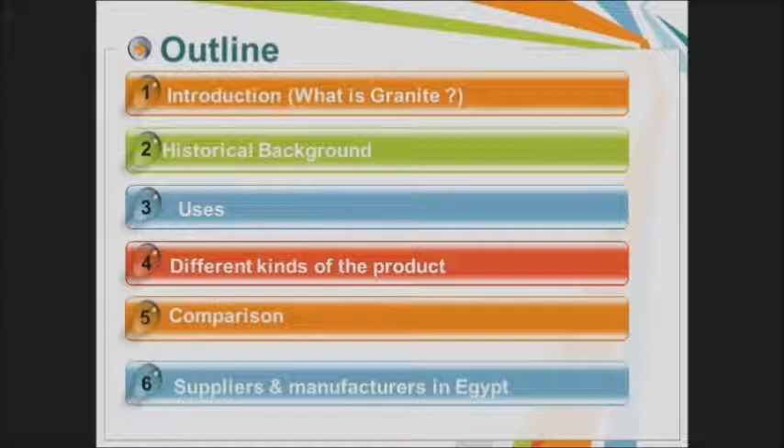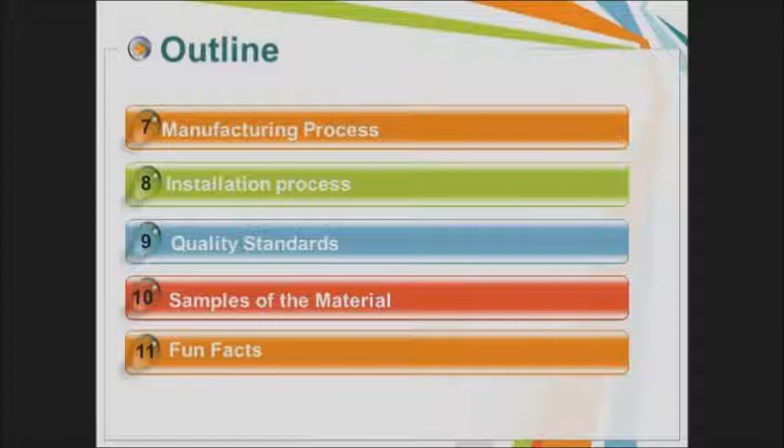What is granite? Granite, from 'granum' meaning grains, refers to its coarse grain structure. It is an igneous rock with visible crystalline form and texture, composed of feldspar and quartz (light colors) and small amounts of mica and other minerals (dark).

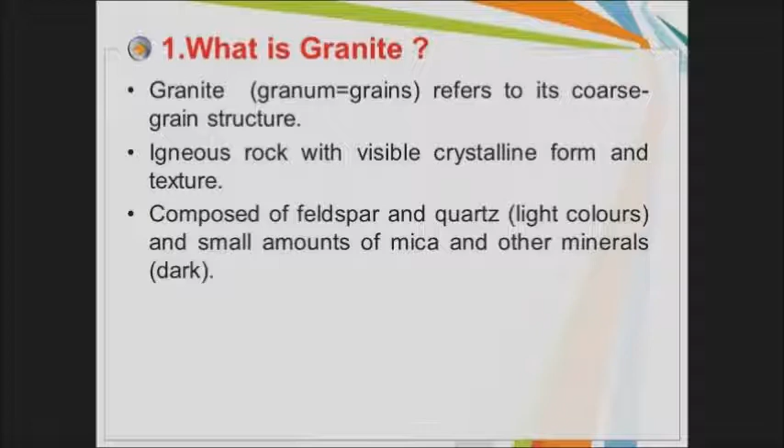Granite is formed from the crystallization of magma under the Earth's surface. The slower the magma cools, the larger the crystals become. Natural granite has no fabric, while sedimentary granite, granite gneiss, is known by its strong fabric.

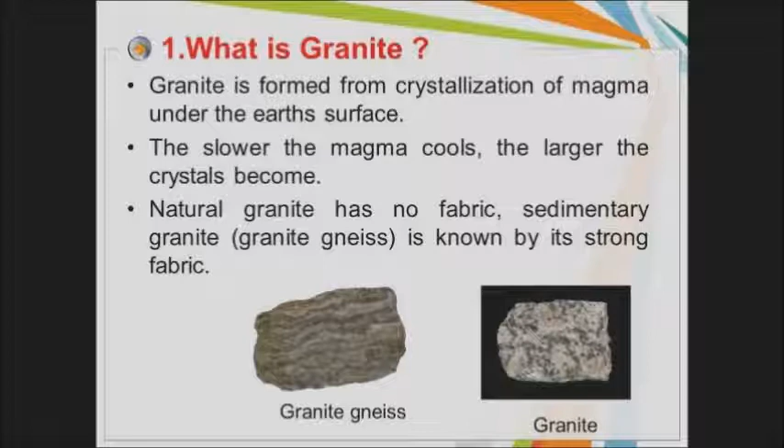Commercially, the word granite corresponds with any rock that is hard and has large grains, for example diorite, gabbro, granodiorite, etc.

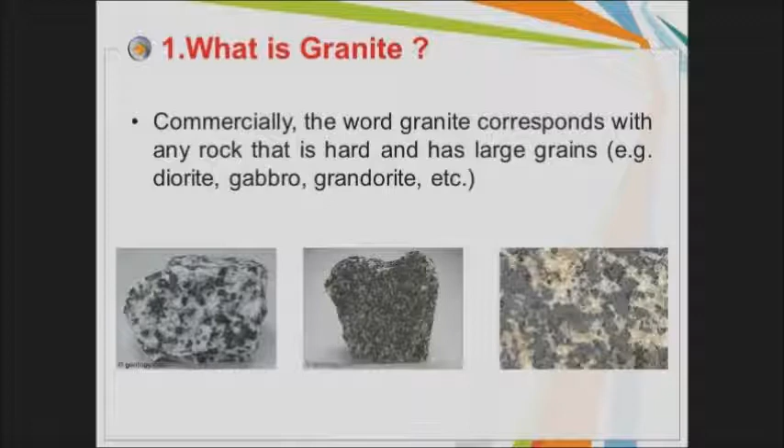Granites come from all over the world, for example India, Egypt, Spain, Brazil, Norway and Africa. Canada and the United States also produce some very good quality granite. Where the stone originates has a high impact on the cost because of transportation and labor. Red granites and blue granites tend to be priced a bit higher than other colors because they are more rare.

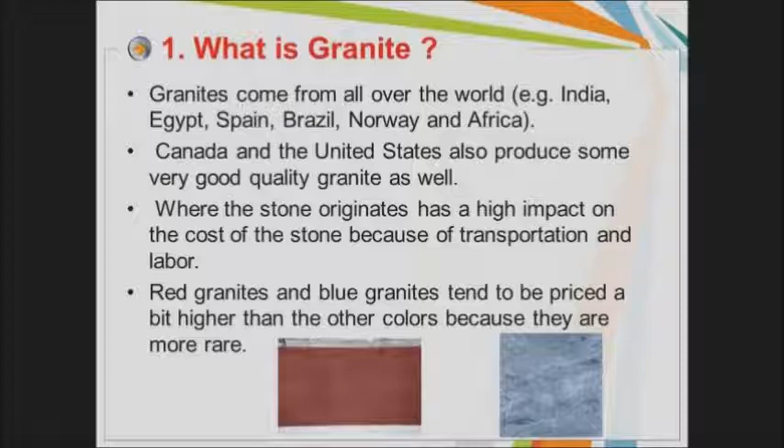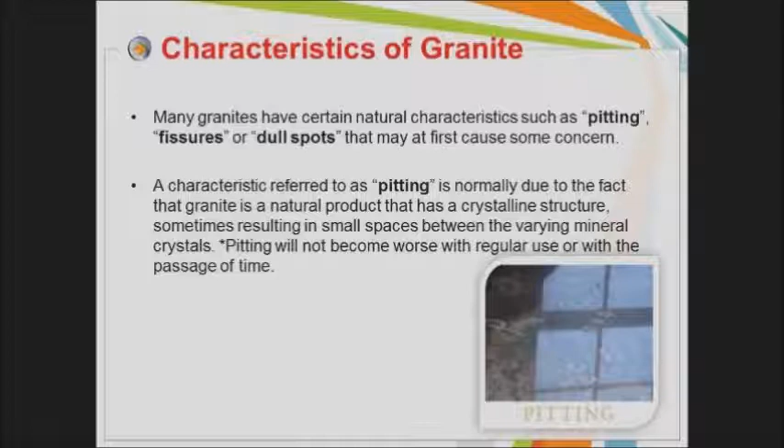Characteristics of granite: many granites have certain natural characteristics such as pitting, fissures or dull spots that may at first cause some concern. Pitting is normally due to the fact that granite is a natural product with a crystalline structure, sometimes resulting in small spaces between the varying mineral crystals. Pitting will not become worse with regular use or with the passage of time.

Many types of granite have small fissures or hairline cracks on the surface of the slab, usually more visible in the larger quartz crystals. Fissures are a natural result of the heating and cooling of the stone during its formation millions of years ago. Fissures will not grow or expand over time.

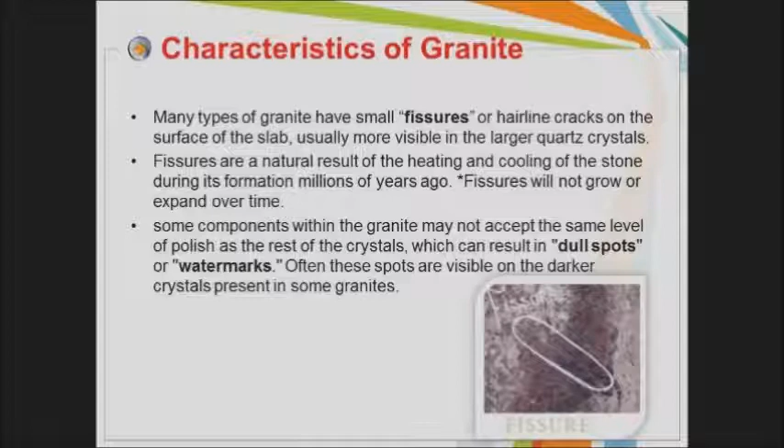Some components within the granite may not accept the same level of polish as the rest of the crystals, which can result in dull spots or watermarks. Often these spots are visible on the darker crystals present in some granites.

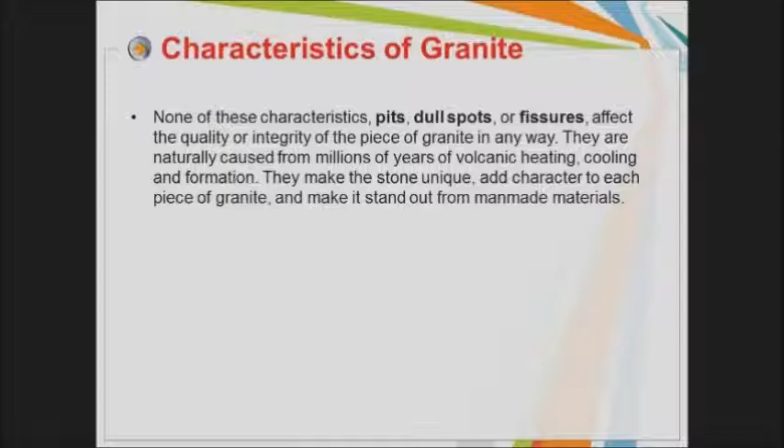None of these characteristics—pits, dull spots, or fissures—affect the quality or integrity of the piece of granite in any way. They are naturally caused from millions of years of volcanic heating, cooling and formation. They make the stone unique, add character to each piece of granite, and make it stand out from man-made materials.

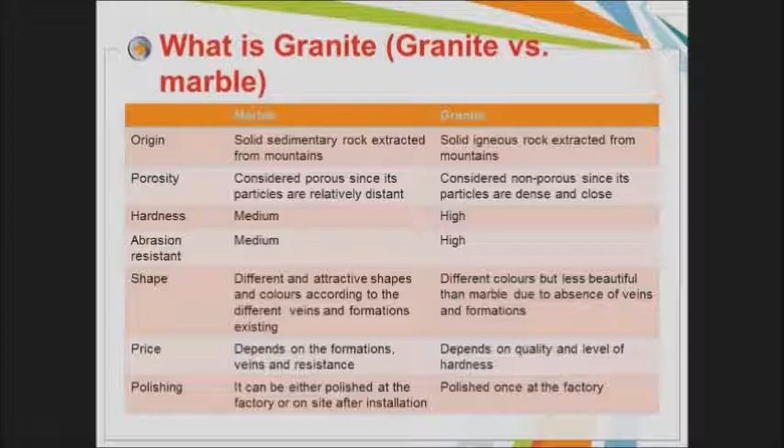Historical background: Ancient Egyptians used Egyptian granite in their temples and monuments, such as the Temple of Abu Simbel and their numerous obelisks. Romans recognized the importance of Egyptian materials and continued to consider Egypt their outstanding source of marble and granite, in spite of the easier availability of materials throughout the empire.

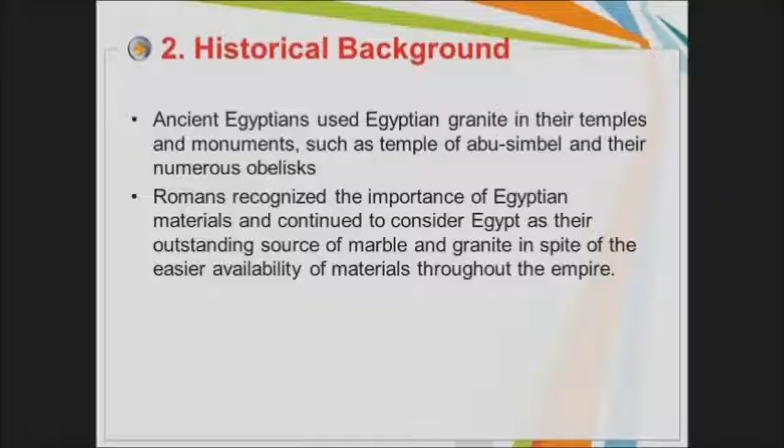During the 19th and 20th century, marble and granite were used on a limited scale for luxurious buildings and were mainly imported. In 1948 only 2 companies were working in the quarrying activities. The sector gained importance starting from the late 50s with the construction of the High Dam of Aswan, which required an incredible amount of stone material.

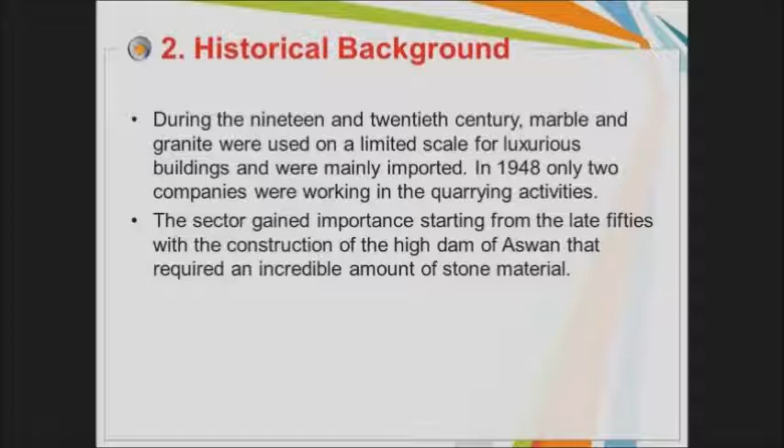For the first time, Egypt's five-year plan (1960-1965) included projects related to the extraction and utilization of ornamental stone. This measure was immediately reflected by a sharp reduction of imports.

The development of the sector in recent times practically started in 1979, when only a few public and some private companies were active using old-fashioned sand gang saws. A jump forward was made in 1980 with the introduction of the first diamond gang saws for marble.

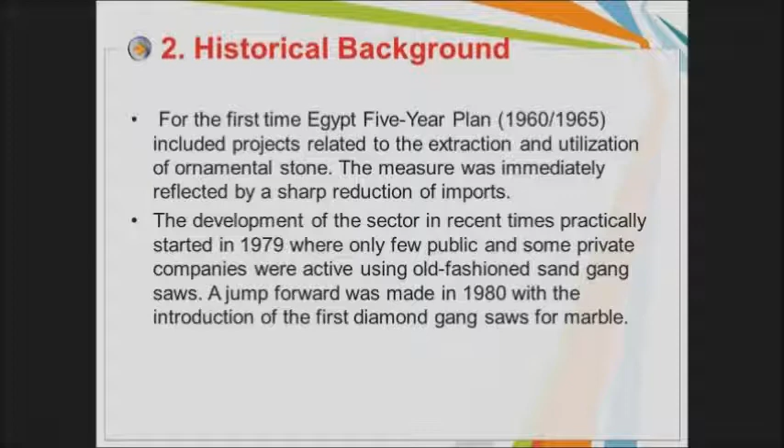With the privatization trend in the 1990s, private investors started to get massively into the marble and granite sector: high demand, limited supply, low barriers to entry. Since then the growth gradually continued.

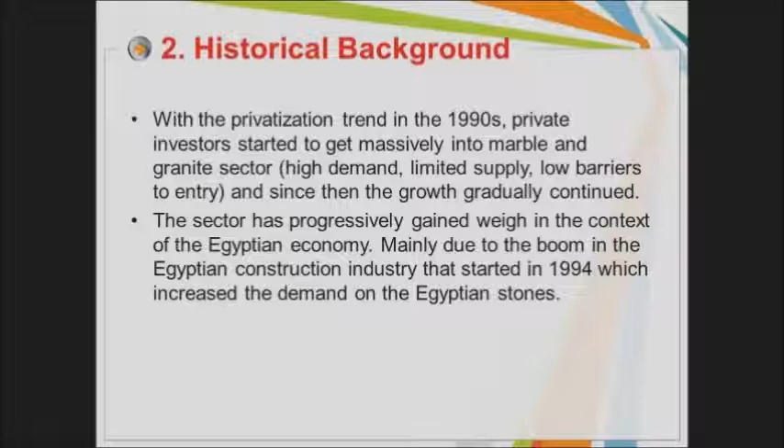The sector has progressively gained weight in the context of the Egyptian economy, mainly due to the boom in the Egyptian construction industry that started in 1994, which increased the demand for Egyptian stones. The competitive advantage of Egyptian marble and granite comes from the variety of its colors, now popular worldwide. Nevertheless, the image of Egyptian stone products still needs to gain recognition at the world level.

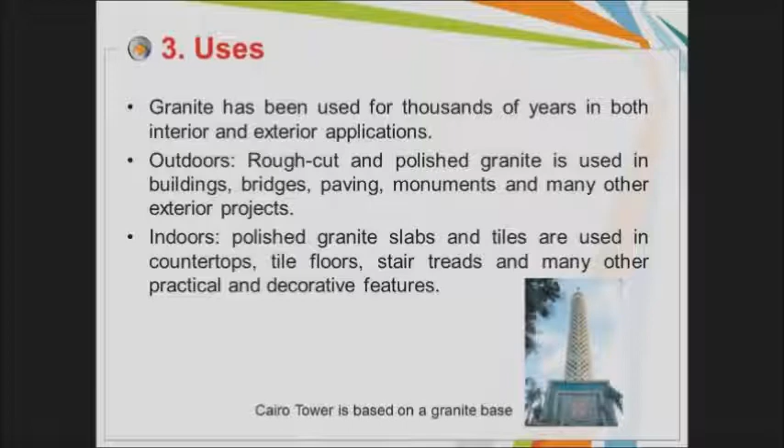Uses: granite has been used for thousands of years in both interior and exterior applications. Outdoors, rough-cut and polished granite is used in buildings, bridges, paving, monuments and many other exterior projects. Indoors, polished granite slabs and tiles are used in countertops, tile floors, stair treads and many other practical and decorative features. For example, the Cairo Tower is based on a granite base.

Granite as a countertop surface provides one of the most attractive and durable surfaces available. It is scratch-proof, stain-resistant and heat-resistant, and tolerates exposure to vinegar, citrus juices, and other household substances. It has superb antimicrobial quality, second only to stainless steel. Granite is easy to clean with just warm water and a soft cloth.

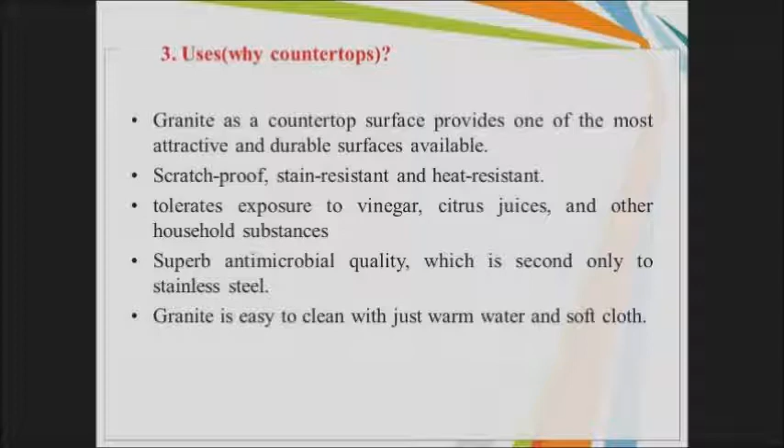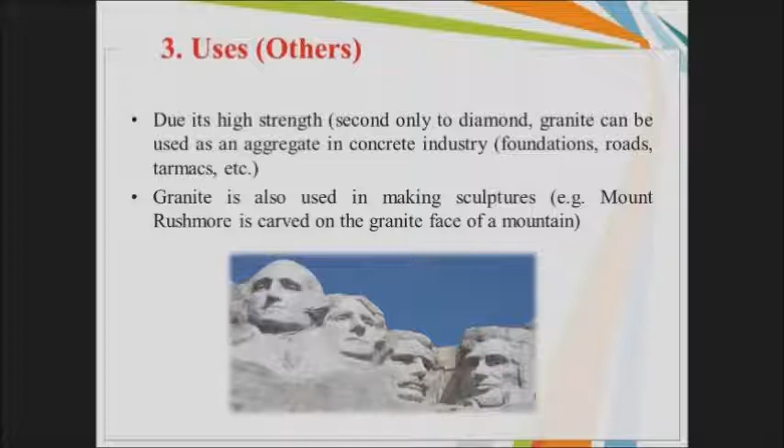Due to its high strength, second only to diamond, granite can be used as an aggregate in the concrete industry—foundations, roads, tarmacs, etc. Granite is also used in making sculptures; for example, Mount Rushmore is carved on the granite face of a mountain.

Different kinds of granite. A comparison between some granites in terms of color, origin, water absorption, compressive strength, density, flexural strength and recommended usage.

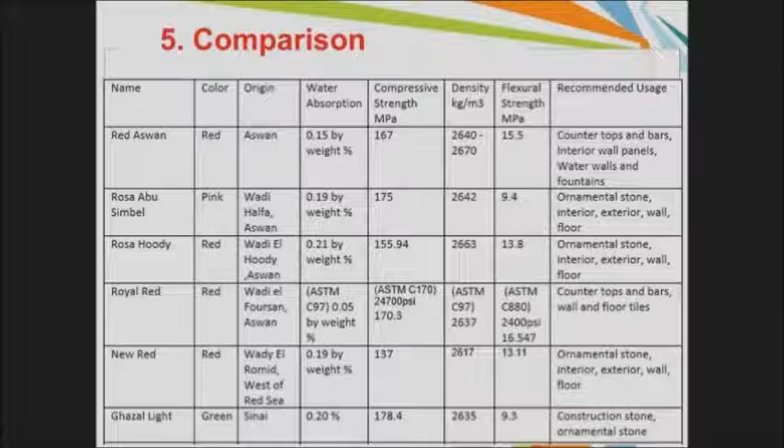Cost and suppliers of granites.

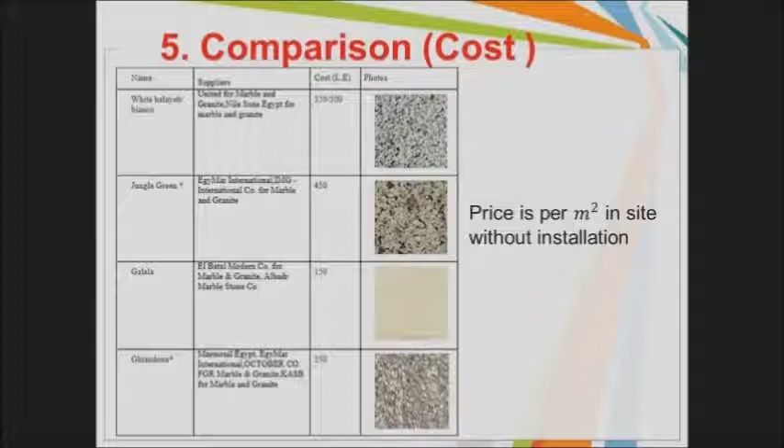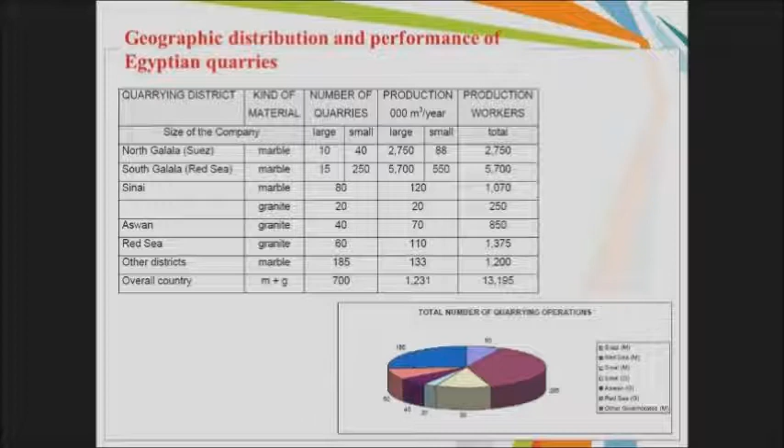Location of different types in Egypt. Geographic distribution and performance of Egyptian quarries.

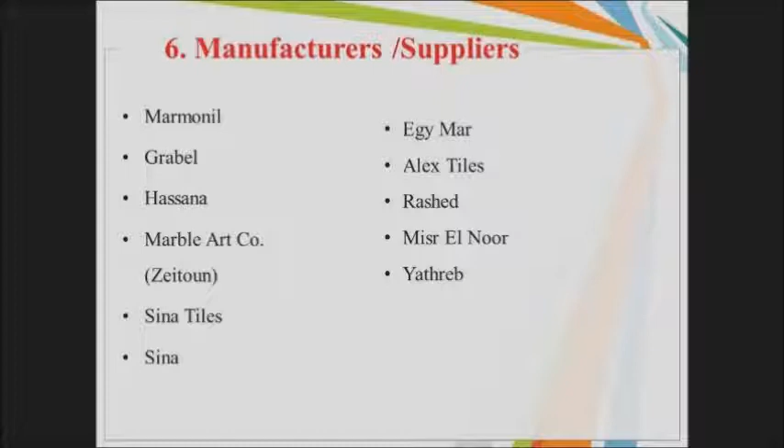Six manufacturers and suppliers: Marmonil, Grabel, Hassana, Marble Art Co., Zeitoun, Sina Tiles, Sina, Egy Mar, Alex Tiles, Rashed, Misr El Noor, Yathreb.

Manufacturing process: Quarrying and manufacturing of granite headstones is not as complex as it may seem. The hardest part of the process is locating strong, high-quality granite that is fit for creating monuments, because not all granite is the same.

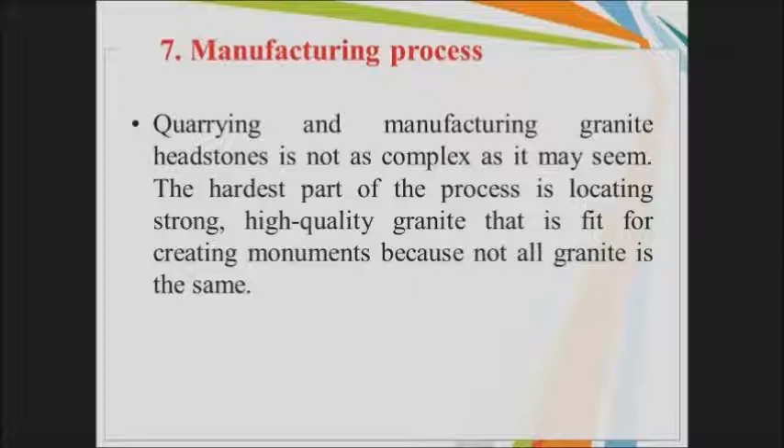Once the granite is located, the quarrying process begins and large sections of the earth are dug up in order to remove large chunks of the rock. Granites that have smaller grain size are found 30 to 40 km below the Earth's surface and are more expensive to retrieve, thus creating a higher price.

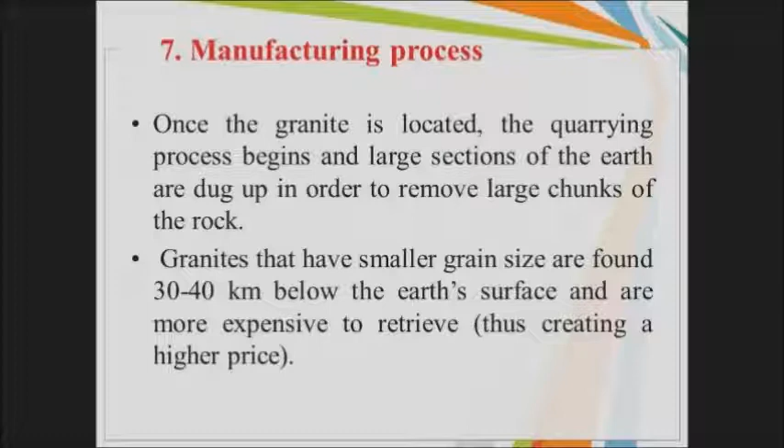Quarrying: the main objective of the quarrying process is to remove large chunks of the rock on Earth's surface to reveal the granite underneath it. Caving methods based on huge blasts of rock were popular in the past. Before the advance of cutting technologies, explosives caused cracks in the rocks.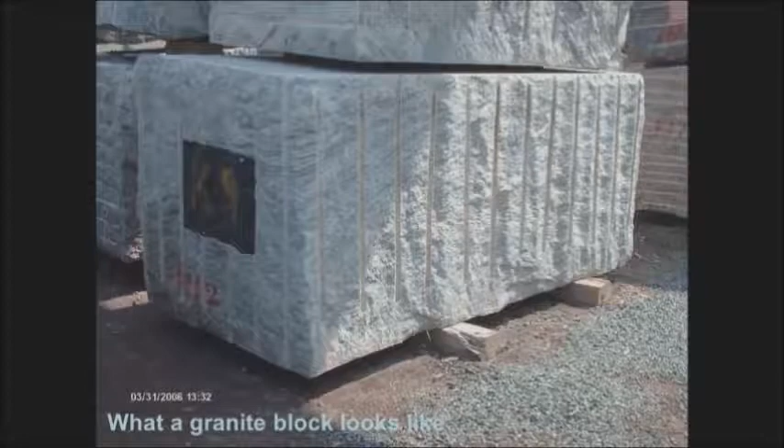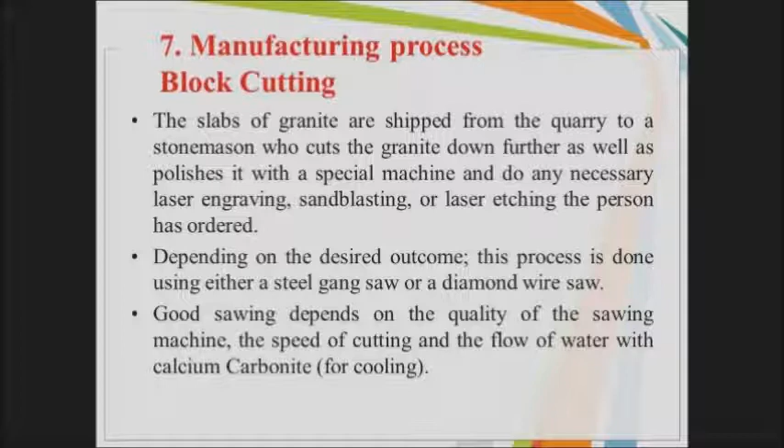Block cutting: the slabs of granite are shipped from the quarry to a stonemason who cuts the granite down further as well as polishes it with a special machine and does any necessary laser engraving, sandblasting, or laser etching the person has ordered. Depending on the desired outcome, this process is done using either a steel gang saw or a diamond wire saw. Good sawing depends on the quality of the sawing machine, the speed of cutting and the flow of water with calcium carbonate, for cooling.

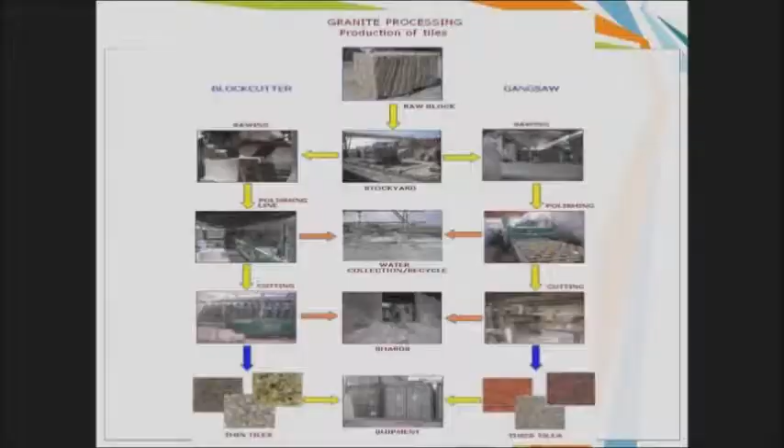Manufacturing process treatment: since granite is a very solid and compacted material, it doesn't need much treatment except having to fill some of its pinholes with lead particles, which makes it better for polishing. A furnace using epoxy under high temperature is used for treatment.

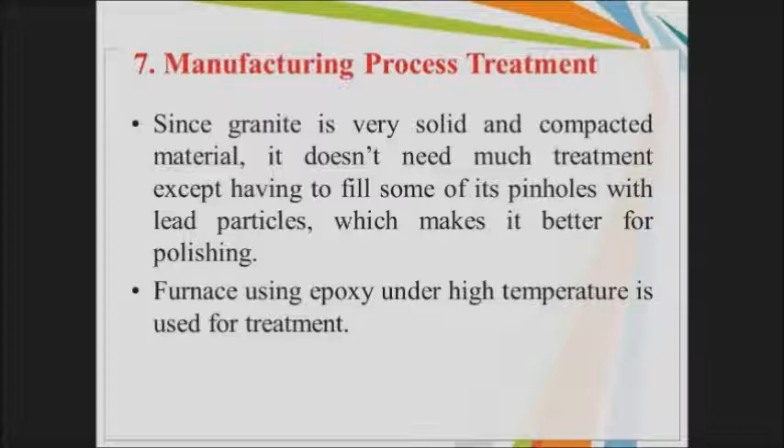Manufacturing process finishing. Types of finishing: polished, honed, brushed, bush hammered, flamed, sandblasting, leathered/antique.

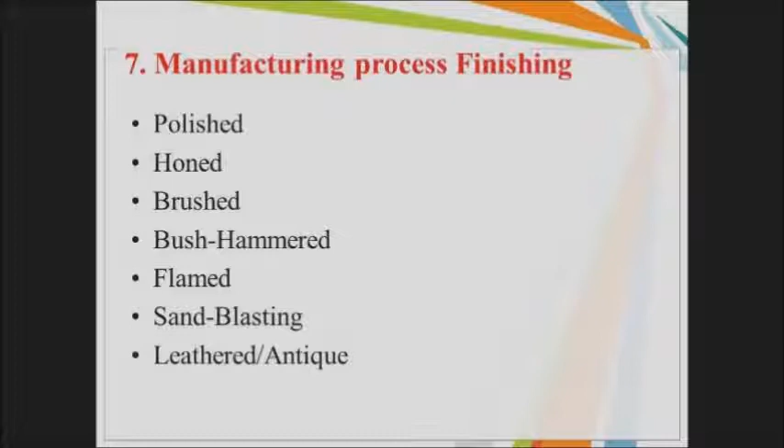Polished finishing: polishing is a process in which tiny grains are used to grind the surface of a material in order to make it perfectly flat and smooth without a scratch. The success of the entire stone roughing, cutting, and grinding process is linked to this stage because the polish determines the value of the stone product at last.

Polished finish is definitely the most common. This type of finish is a great choice, especially for kitchens. It's easier to keep polished surfaces clean and free from staining because a polished finish seals or closes more of the pores on the stone's surface, thus increasing its resistance to humidity as well as chemical substances. Granite's polished finish can often be described as both shiny and mirror-like.

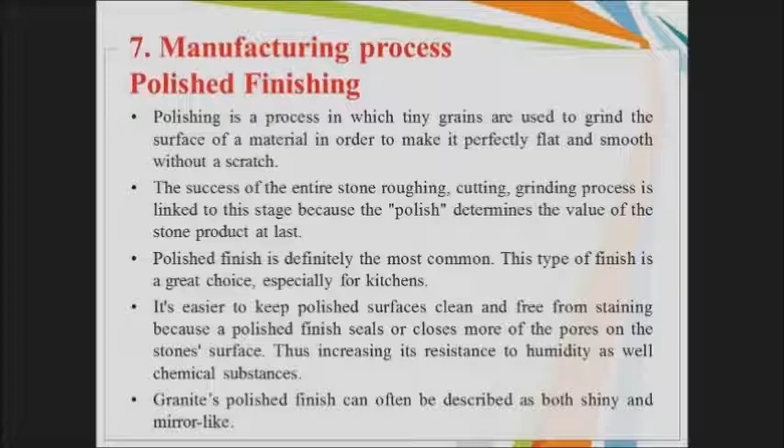A granite slab is placed on a conveyor belt. Areas face up are the ones that will be polished. The conveyor belt moves the granite slab through a series of polishing wheels that use both coarse abrasion pads as well as fine polishing pads. Polishing the surface of granite involves grinding and cutting with coarse pads, as well as buffing with fine pads.

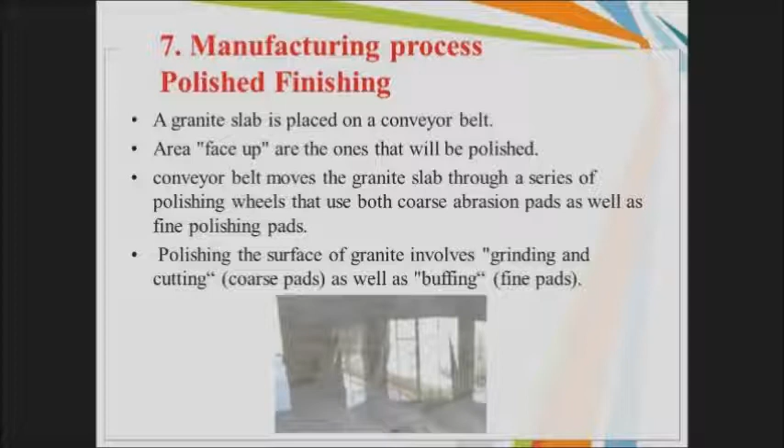Honed finishing: a honed surface finish is a smooth surface without reflection. It is not super shiny and there's very little, if any, reflection. Some call this finish soft or natural looking, and others refer to it as just plain and dull looking. To achieve this finish, the finishing process ends before the buffing stage.

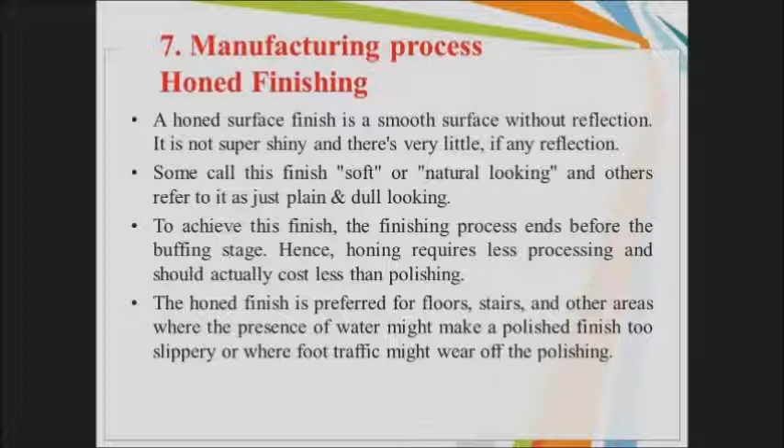Hence, honing requires less processing and should actually cost less than polishing. The honed finish is preferred for floors, stairs, and other areas where the presence of water might make a polished finish too slippery, or where foot traffic might wear off the polishing.

Honed finishes are slowly becoming more and more popular for newly installed granite countertops. This type of finish is smooth and also less shiny than polished finishes. Its less shimmering appearance gives your home a slightly more casual and contemporary feel while maintaining the elegant feel granite is known for. A drawback of honed finishes is they are, unfortunately, known to show more stains compared to other finishes, being more porous, but this problem can be solved using certain types of sealers.

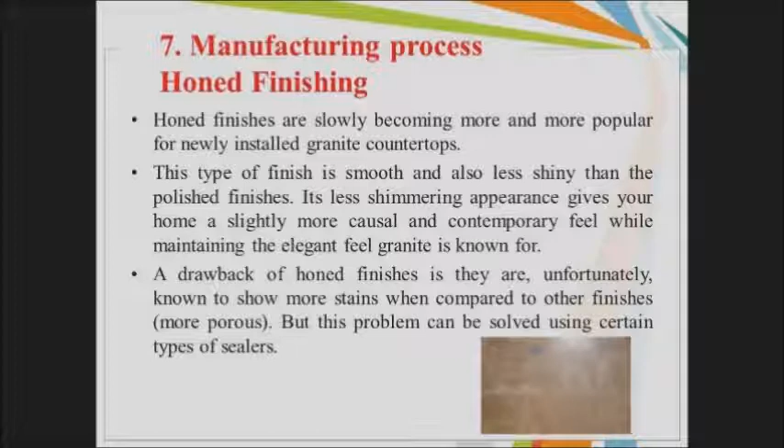Brushed finishing: diamond abrasive brushes are substituted for polishing bricks during the finishing process. It is a very textured finish and is not recommended for heavily used areas. The brushed finish also dilutes the true color of the stone and will need to be enhanced often.

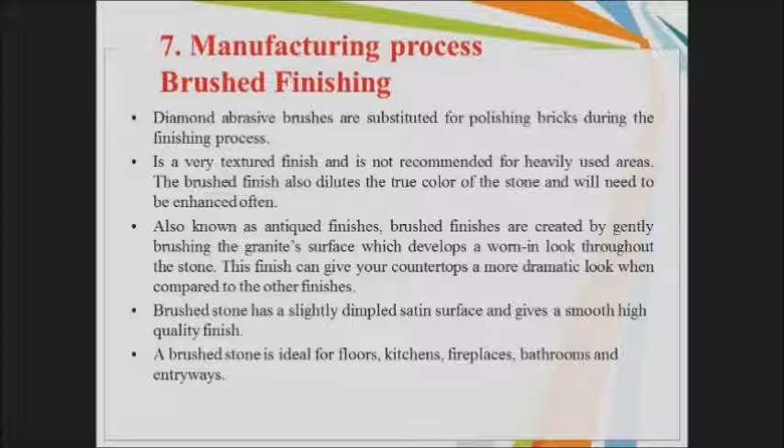Also known as antiqued finishes, brushed finishes are created by gently brushing the granite surface, which develops a worn-in look throughout the stone. This finish can give your countertops a more dramatic look compared to other finishes. Brushed stone has a slightly dimpled satin surface and gives a smooth high-quality finish. A brushed stone is ideal for floors, kitchens, fireplaces, bathrooms and entryways.

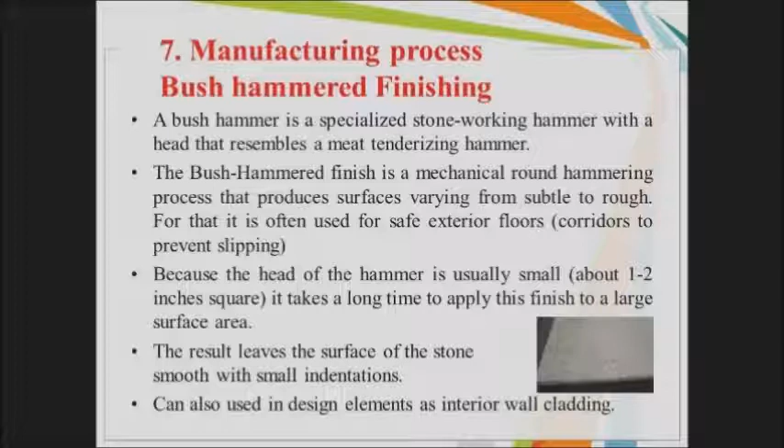Bush hammered finishing: a bush hammer is a specialized stoneworking hammer with a head that resembles a meat tenderizing hammer. The bush hammered finish is a mechanical round hammering process that produces surfaces varying from subtle to rough. It is often used for safe exterior floors and corridors to prevent slipping. Because the head of the hammer is usually small, about 1 to 2 inches square, it takes a long time to apply this finish to a large surface area. The result leaves the surface of the stone fairly smooth with small indentations. It can also be used in design elements as interior wall cladding.

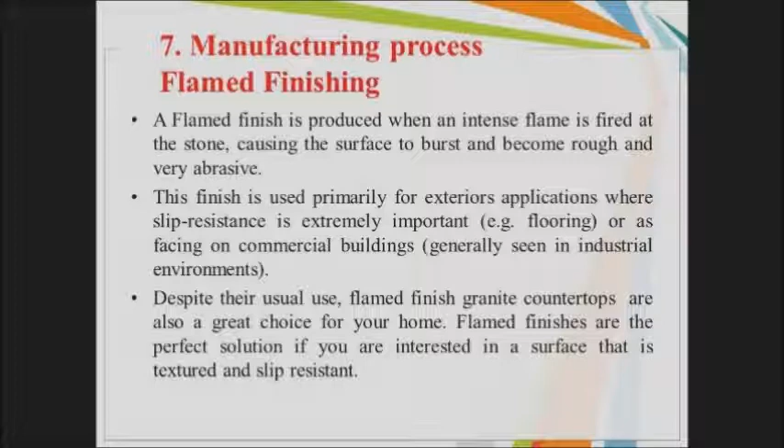Flamed finishing: a flamed finish is produced when an intense flame is fired at the stone, causing the surface to burst and become rough and very abrasive. This finish is used primarily for exterior applications where slip resistance is extremely important, for example flooring, or as facing on commercial buildings, generally seen in industrial environments. Despite their usual use, flamed finish granite countertops are also a great choice for your home. Flamed finishes are the perfect solution if you are interested in a surface that is textured and slip resistant.

It is labor intensive and can be costly. The texture is achieved by heating the surface of the stone to extreme temperatures, followed by rapid cooling. This exposure to extreme temperature change causes the granite to melt, and in the process, shatter some crystals. This leaves the granite with a highly textured surface.

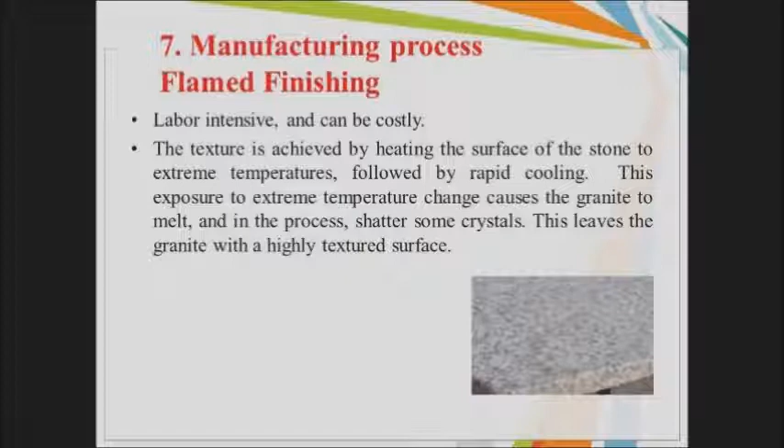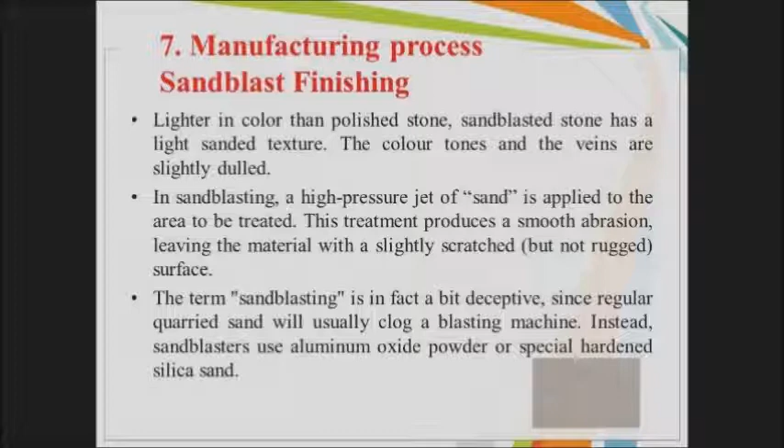Sandblast finishing: lighter in color than polished stone, sandblasted stone has a light sanded texture. The color tones and the veins are slightly dulled. In sandblasting, a high-pressure jet of sand is applied to the area to be treated. This treatment produces a smooth abrasion, leaving the material with a slightly scratched, but not rugged, surface. The term sandblasting is in fact a bit deceptive, since regular quarried sand will usually clog a blasting machine. Instead, sandblasters use aluminum oxide powder or special hardened silica sand.

Sandblasting for granite designs: a flat sheet of rubber is first placed on top of the granite, and the design is then cut out of the rubber. The granite is placed in a sandblasting room for the final carving process. A worker uses high air pressure and special sand forced through a nozzle at the tip of the hose, which then carves out the design and lettering. The area of the granite headstone covered by the rubber sheet is well protected.

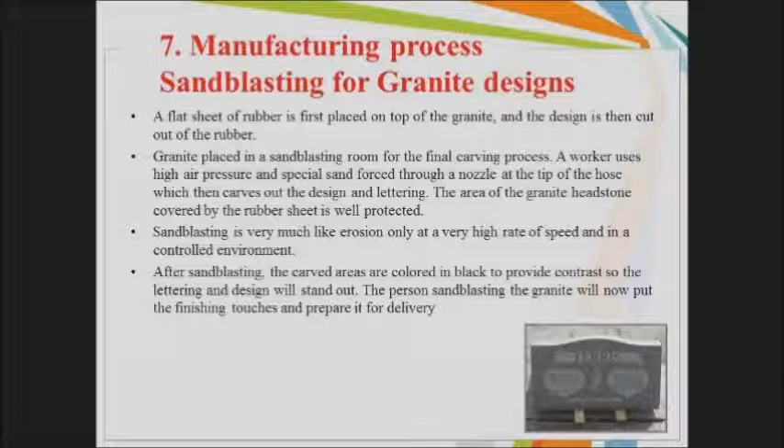Sandblasting is very much like erosion, only at a very high rate of speed and in a controlled environment. After sandblasting, the carved areas are colored in black to provide contrast so the lettering and design will stand out. The person sandblasting the granite will now put the finishing touches and prepare it for delivery.

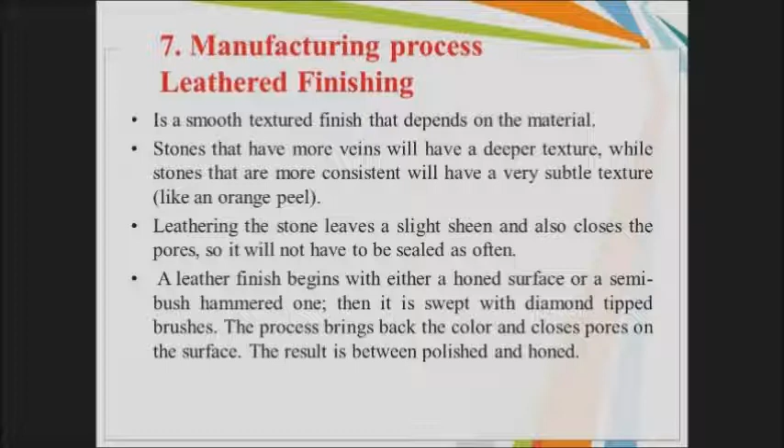Leathered finishing is a smooth textured finish that depends on the material. Stones that have more veins will have a deeper texture, while stones that are more consistent will have a very subtle texture, like an orange peel. Leathering the stone leaves a slight sheen and also closes the pores, so it will not have to be sealed as often. A leather finish begins with either a honed surface or a semi-bush hammered one, then it is swept with diamond-tipped brushes. The process brings back the color and closes pores on the surface. The result is between polished and honed.

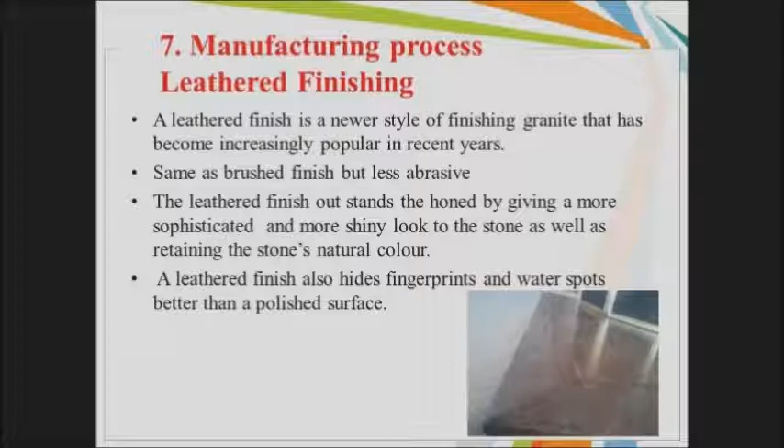A leathered finish is a newer style of finishing granite that has become increasingly popular in recent years. Same as brushed finish but less abrasive. The leathered finish outstands the honed finish by giving a more sophisticated and shinier look to the stone, as well as retaining the stone's natural color. A leathered finish also hides fingerprints and water spots better than a polished surface.

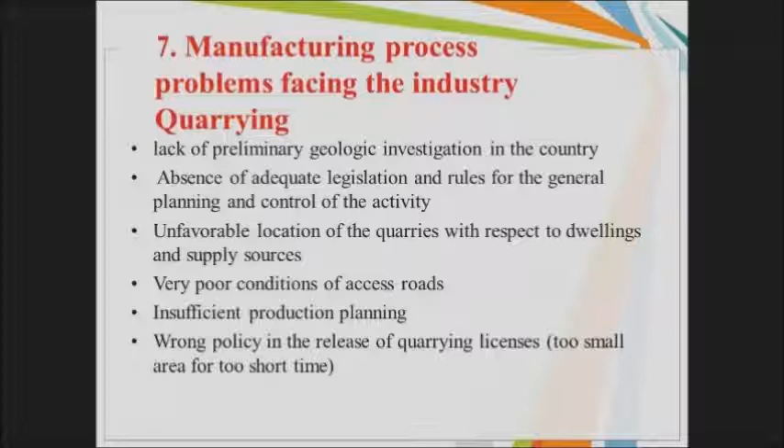Problems facing the industry: quarrying. Lack of preliminary geologic investigation in the country. Absence of adequate legislation and rules for the general planning and control of the activity. Unfavorable location of the quarries with respect to dwellings and supply sources. Very poor conditions of access roads. Insufficient production planning, and wrong policy in the release of quarrying licenses, too small an area for too short a time.

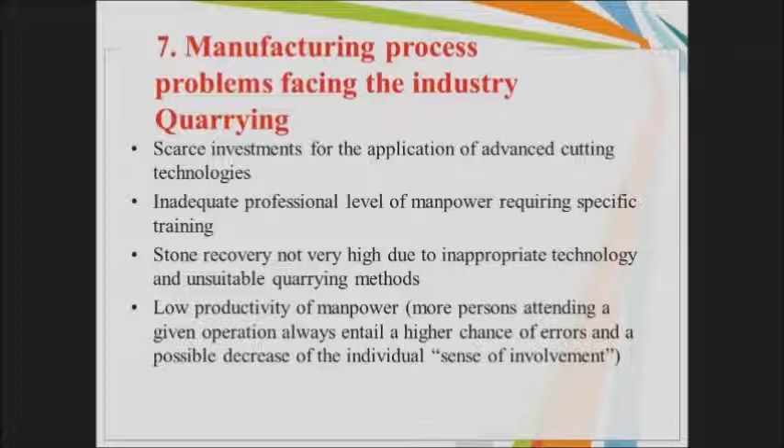Scarce investments for the application of advanced cutting technologies. Inadequate professional level of manpower requiring specific training. Stone recovery not very high due to inappropriate technology and unsuitable quarrying methods. Low productivity of manpower. More persons attending a given operation always entail a higher chance of errors and a possible decrease of the individual sense of involvement.

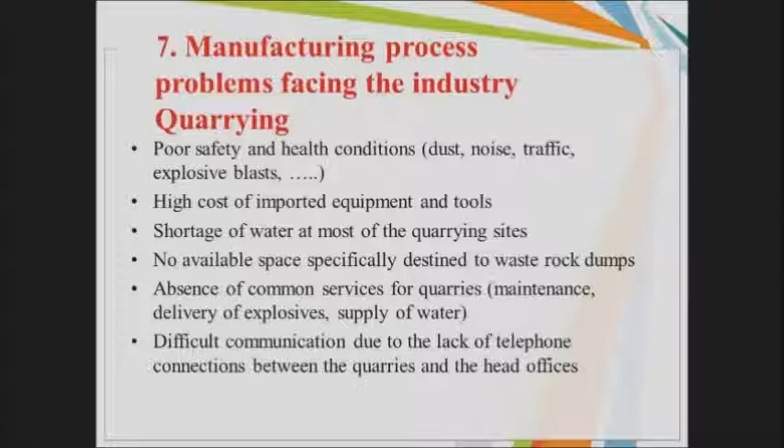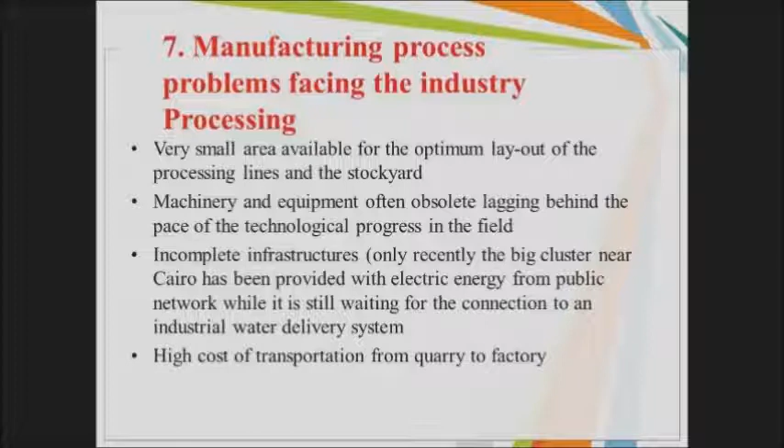Infrastructures remain incomplete. Only recently has the big cluster near Cairo been provided with electric energy from the public network, while it still awaits connection to an industrial water delivery system. There is also a high cost of transportation from quarry to factory.

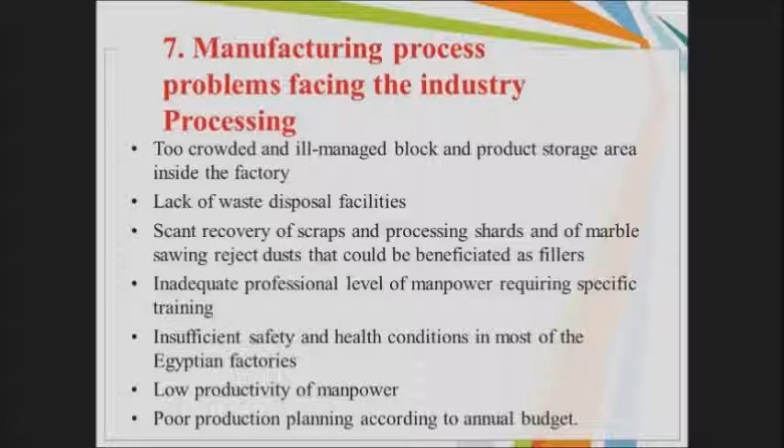There is an inadequate professional level of manpower requiring specific training, insufficient safety and health conditions in most Egyptian factories, and low productivity of manpower due to poor production planning according to annual budget.

Installation: granite can be used at the construction site for wall cladding, floor execution, skirting, and countertops. There are two ways for installation: manual installation, by four different methods, and mechanical installation.

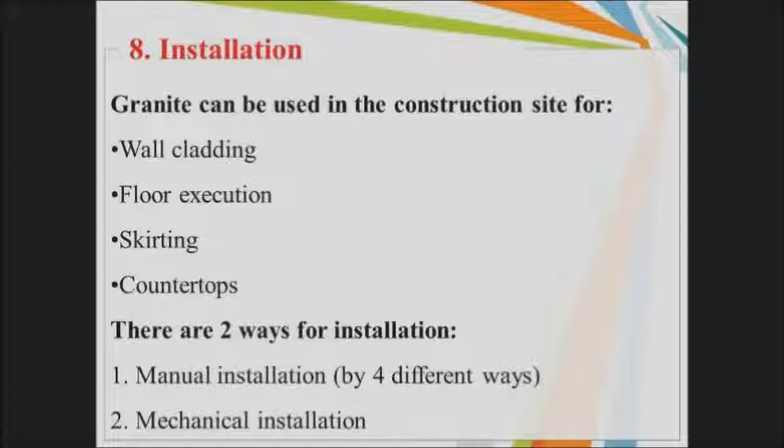Manual installation for wall cladding. A) Manual installation using cement mortar, the most commonly used method.

Fixation is done by gypsum paste every 15 cm height, at the corners of each panel, with stainless steel bars fixed to the walls. The gaps between panels and wall are filled with mortar, then the gypsum paste is removed from the cladding.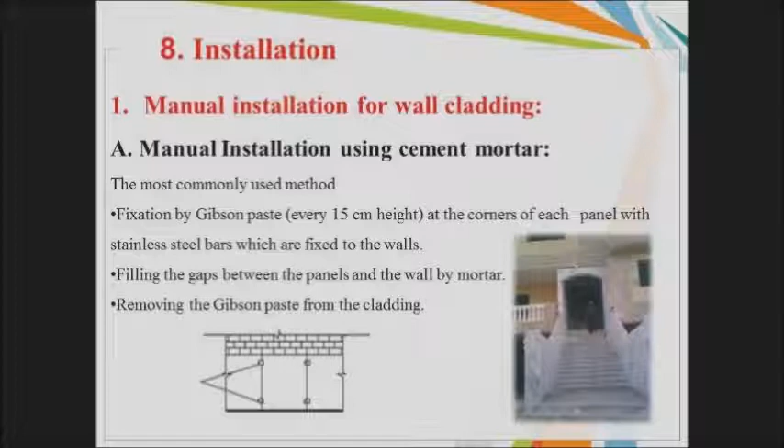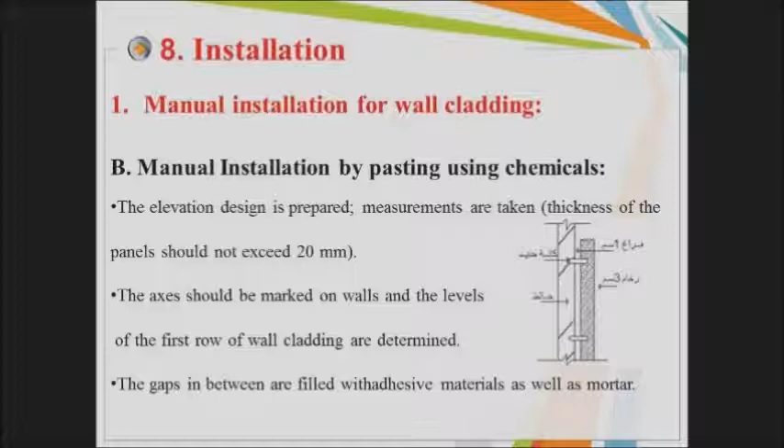B) Manual installation by pasting using chemicals. The elevation design is prepared, measurements are taken, and panel thickness should not exceed 20 mm. Axes are marked on walls, and levels of the first row of wall cladding are determined. The gaps in between are filled with adhesive materials as well as mortar.

C) Manual installation by steel bars. Steel bars with a diameter of 10 mm are used for fixation. The number of bars depends on the length and thickness of the panels. At the back of the panel, a groove is made to place the bars, then filled with mortar.

Holes are drilled in the wall corresponding to the bars at the back of the panels, and these holes are also filled with mortar. The panel is then fixed to the wall with a spacing of 1 cm, which is the mortar thickness. D) Manual installation by anchors and steel bars.

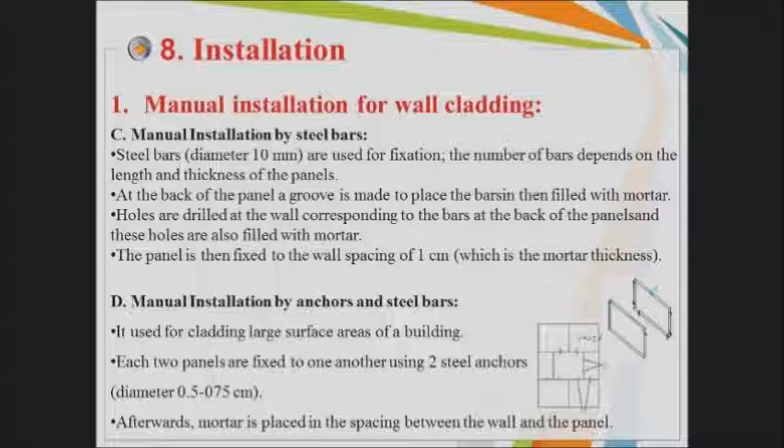This method is used for cladding large surface areas of a building. Each two panels are fixed to one another using two steel anchors, with a diameter of 0.5 to 0.75 cm. Afterwards, mortar is placed in the spacing between the wall and the panel.

Manual installation, flooring execution: 1) Make sure the subfloor is clean and dry. 2) Mortar, one part cement to four parts sand, is prepared. 3) Start with the floor corner tiles.

4) Use a slight twisting motion to press the granite tile into the mortar, and tap it down with a rubber mallet to force out any air pockets and ensure complete contact. 5) Repeat the process until all tiles are laid, using plastic spacers to guarantee correct placement.

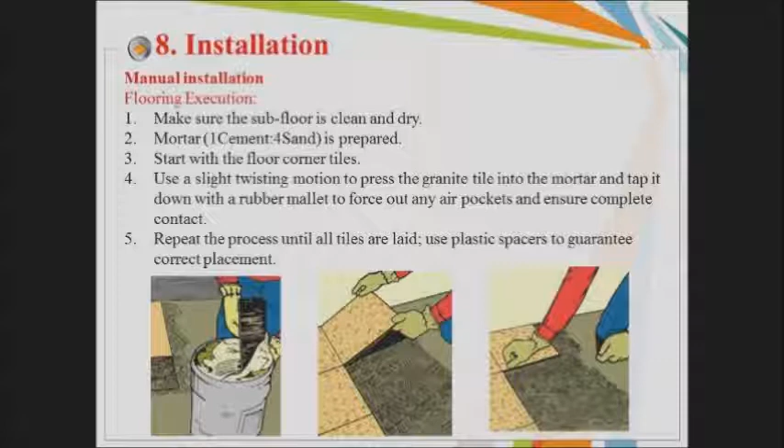Manual installation, countertops installation: 1) Accurate measurements are taken and granite is cut accordingly. 2) Most countertops will have at least one joint because the material comes in sheets less than 3 meters long. 3) Silicone applied at the joints allows for expansion and contraction, and an epoxy holds the granite in place.

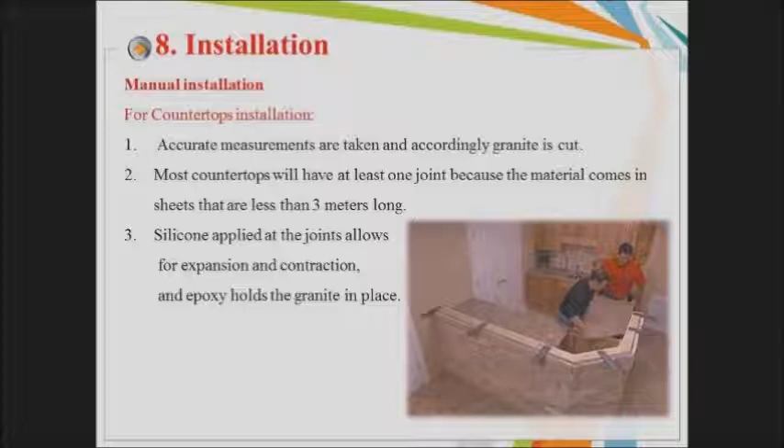Mechanical installation, usually used in facade cladding: 2) The site surveyor should mark the level of the first row of wall cladding. 3) Mechanical accessories are used for fixation, for example Z-bars, which are defined by the specifications.

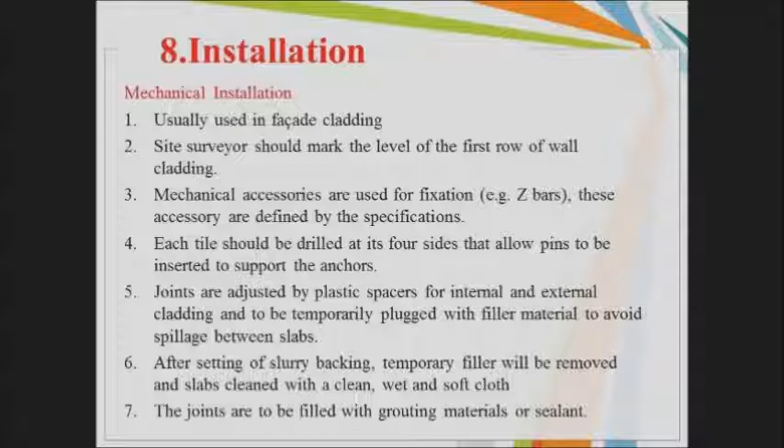4) Each tile should be drilled at its four sides to allow pins to be inserted to support the anchors. 5) Joints are adjusted by plastic spacers for internal and external cladding, temporarily plugged with filler material to avoid spillage between slabs. 6) After the slurry backing sets, the temporary filler is removed and slabs are cleaned with a clean, wet, soft cloth. 7) The joints are filled with grouting materials or sealant.

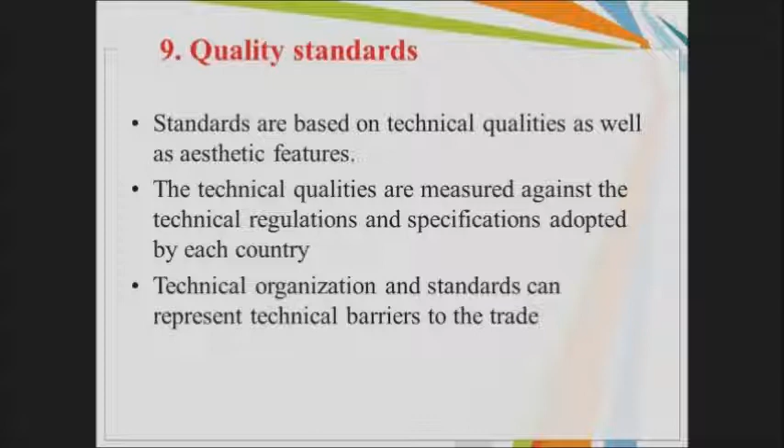Quality standards are based on technical qualities as well as aesthetic features. Technical qualities are measured against the technical regulations and specifications adopted by each country. Technical organization and standards can represent technical barriers to trade.

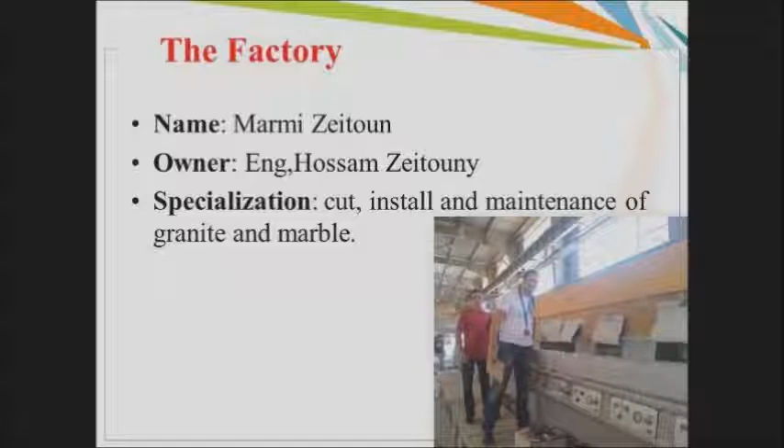The factory: name, Marmi Zeitoun. Owner, Hossam Zeitouny. Specialization: cut, install, and maintenance of granite and marble. Equipment includes: 1) granite block shaping gang saw diamond wire saw, 2) granite block shaping.

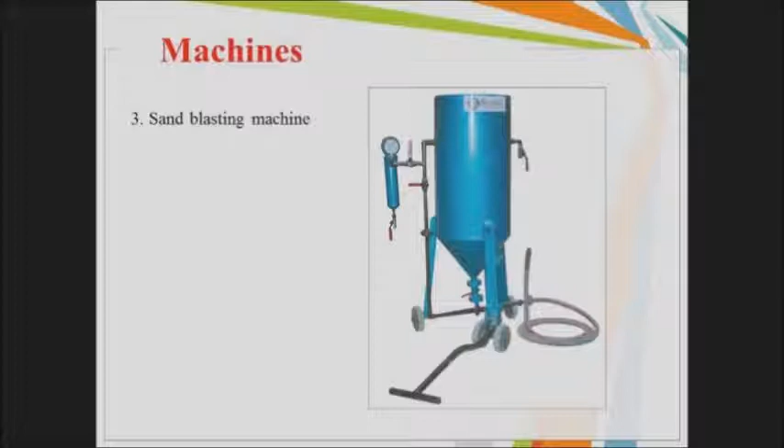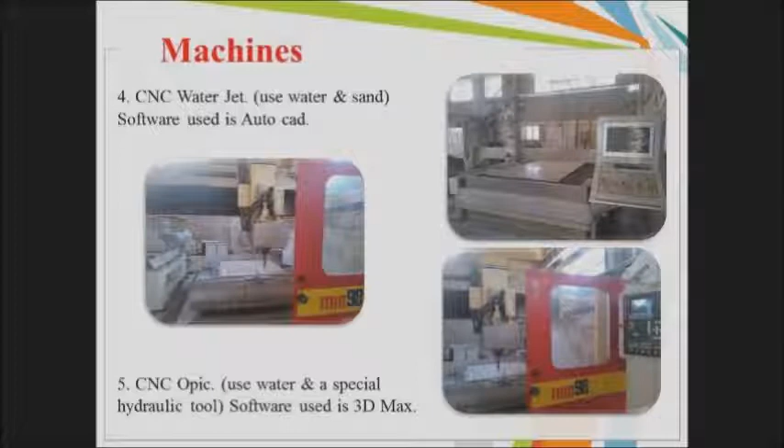3) Sand blasting machine. 4) CNC water jet, which uses water and sand, with AutoCAD software. 5) CNC OPIC, which uses water and a special hydraulic tool, with 3D Max software.

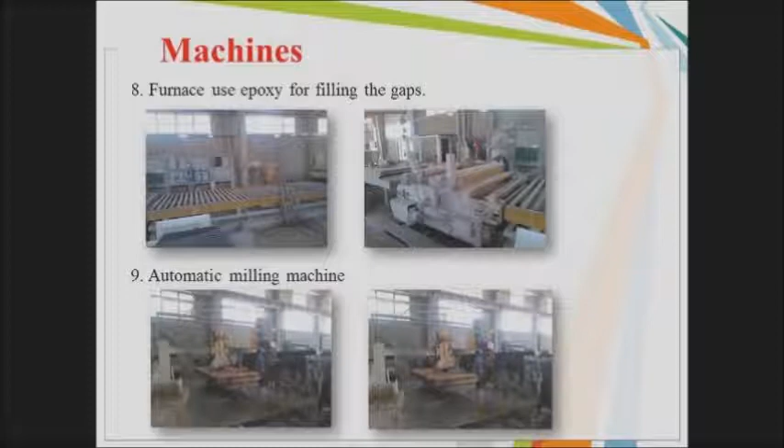6) Statues are a product of the CNC OPIC machine. 7) Automatic polishing machine. 8) Furnace, using epoxy for filling gaps. 9) Automatic milling machine. 10) Manual cutting machine.